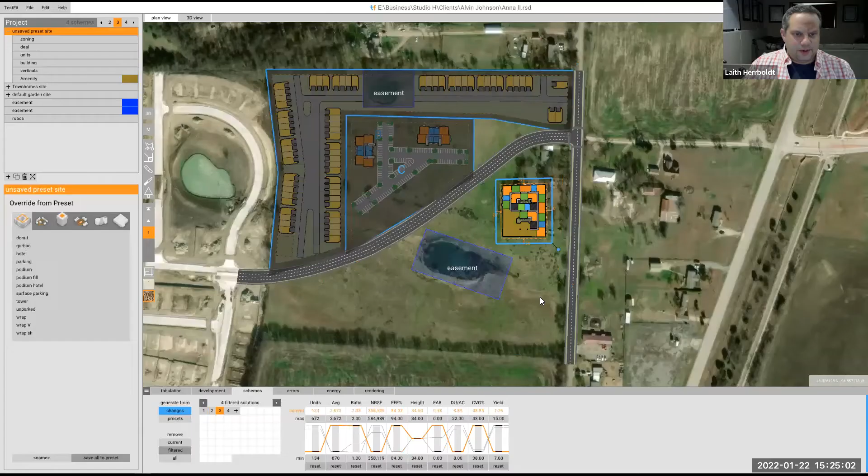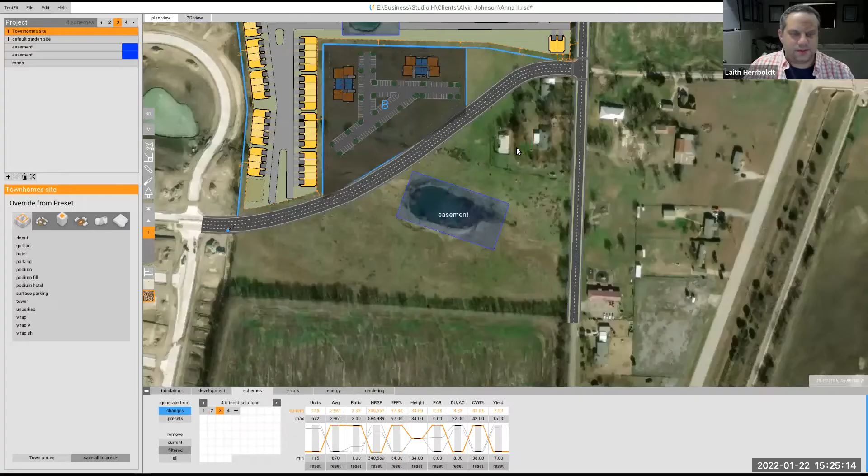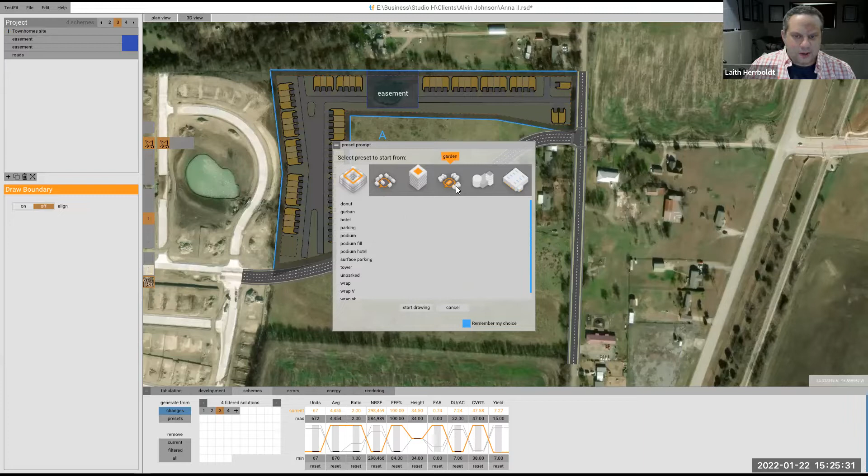So for instance, when we're looking at something like this parcel here, we can take this and in real time, I'll just delete this one and show you how it works in real time. So we can start a new site, tell it what we would like to put on there: garden, garban, podium, a tower, a parking lot, unparked. Do a podium. Okay, so we can just take that.

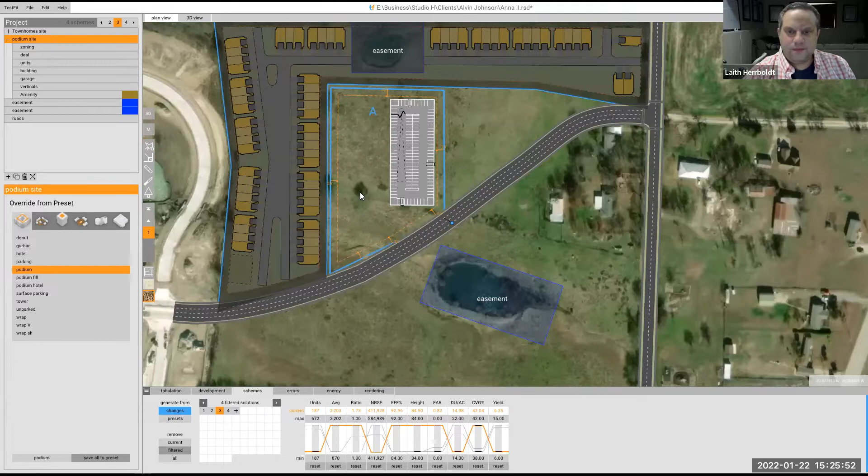And we can start drawing a site here on that 30 acres. And then we immediately have a building, a 2-story parking with 5 stories of apartments over the top of it, with amenity space here. And we can change that, that's set to be 10,000 square feet right now. We can go through the different levels.

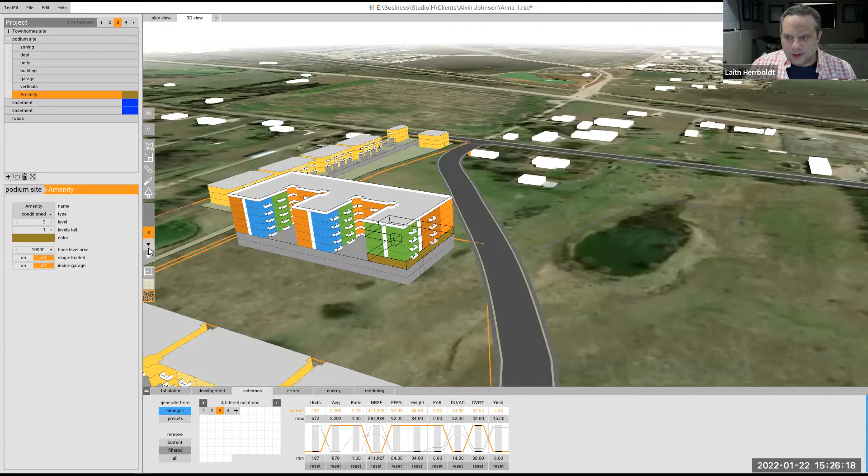I know there's a way to actually push one level of parking down, so we could have a layer of underground parking. But when we go back into plan view and then go up, we can start to see the different levels of the building.

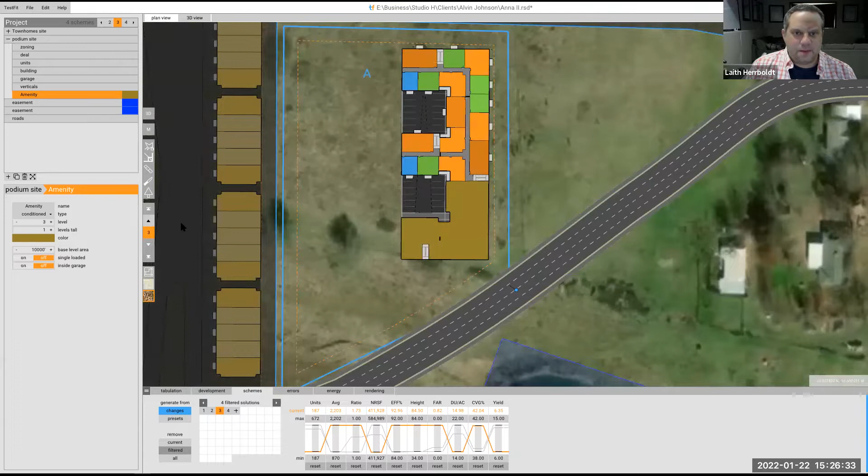So here's our amenity space. We can instantly take this and say, instead of 10,000 square feet, let's put that down to 5,000 square feet. We can single load it and have it just be on one side of the corridor, or we can have it be at the end here. We can say it's okay to put it in the garage. We can tell it what level we want it to be on, so we can move it up if we'd like.

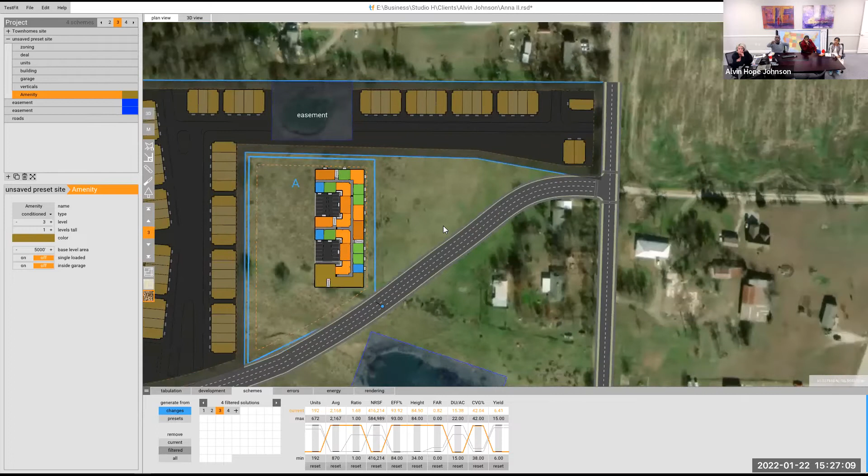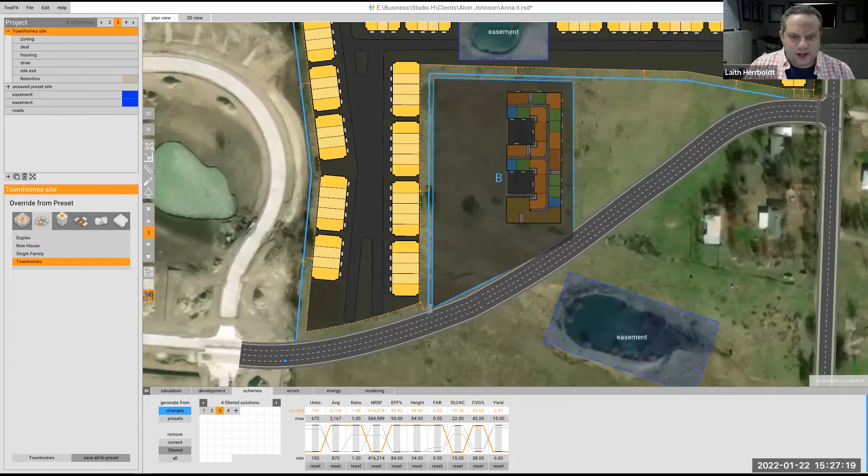Can you also show on that larger tract, or even on that piece, how you can just move it around, even if it were garden style? So even if it's garden style like this, we can take a point, and as we move the property line, it's immediately changing all these townhomes here. You're not having to move the townhome because you move the property line and adjust everything.

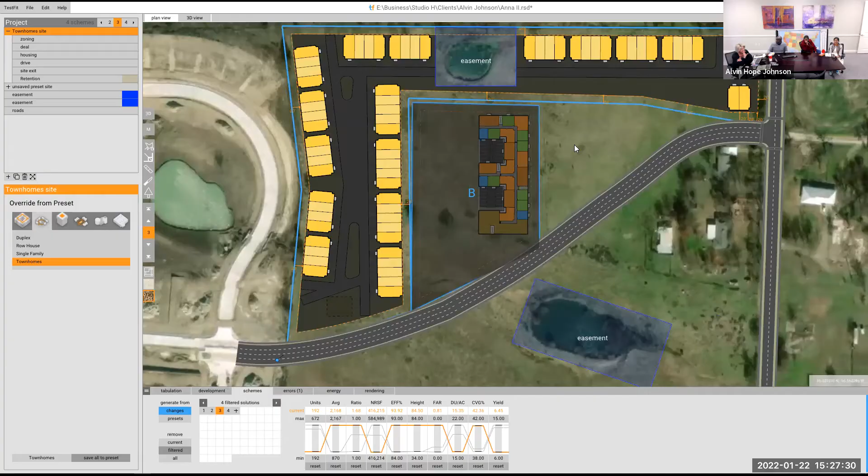That's really cool. You do it based on setbacks of the land, how it's zoned. So all those things can be factored in, the setbacks and everything, and then it just figures out a layout.

He did yours yesterday, the guy, Jack, that is with the company. Have you shown her the software yet? No, that's what Laith said. He's gonna get him that file and be able to show it.

Yeah, it looks really good. So factor all those things in based on the city's requirement, just plug them in, and then it just works.

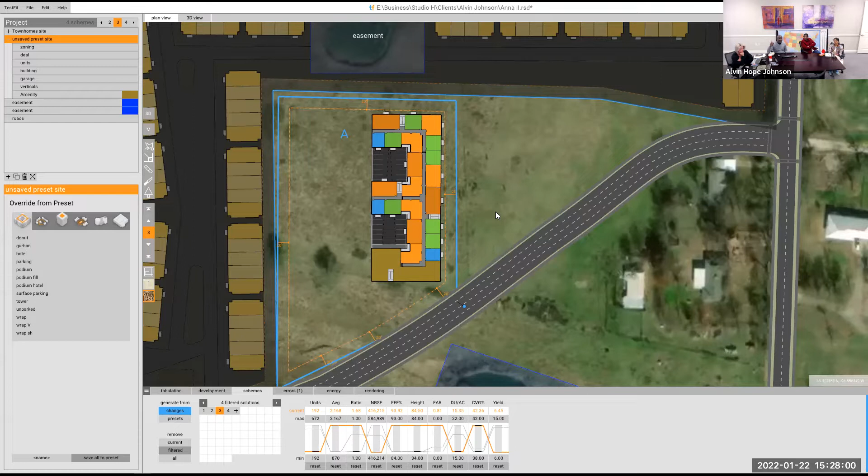If we had this, I don't know that the city would accept this in a zoning meeting, but I think that, and Don help me if I'm wrong, the way Jack played with this the other day, if we sat in a zoning meeting and showed them, this is what the site could look like.

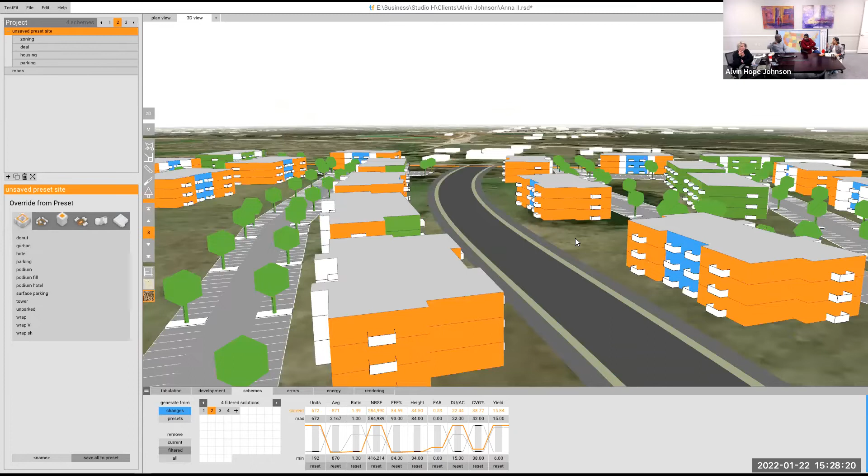Oh, you want the road here, oh you want the road there, and then you just add a sidewalk, tree, here. It also kind of makes it feel like, during the zoning meeting itself, we could progress things, because it's not like a lot of going back and forth, you can just demonstrate it right here on the Zoom, show how it works.

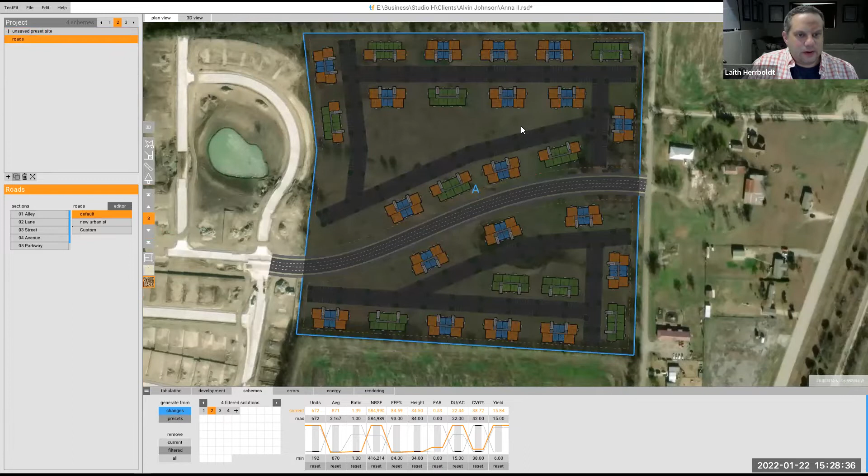For instance, we can just take this road and if we want to move it up, the city says they don't want the intersection here, we can move it up.

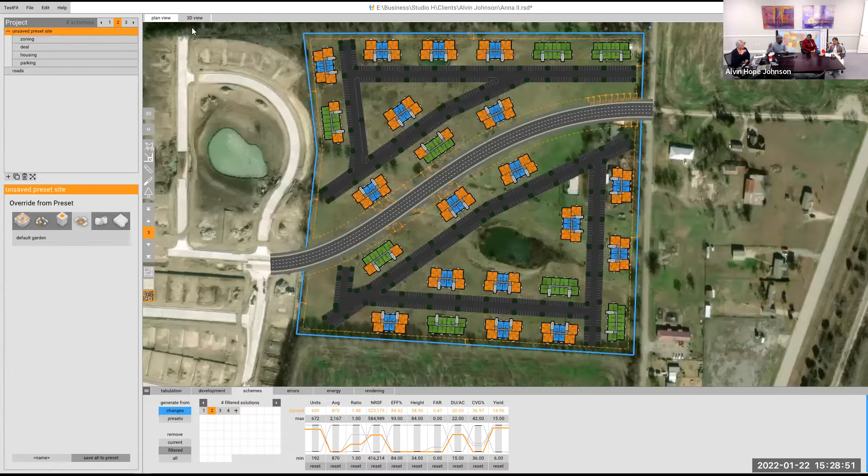We can change the angle of this, and now change what the angle is here. Yes, on any piece of land, isn't that cool? Whether we want 3-story garden apartments or we want something else, and there it is.

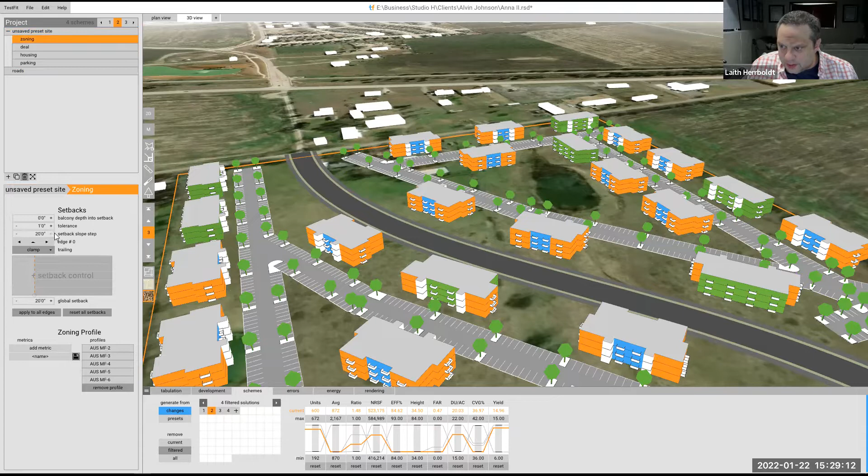Then we can come into the housing and change our floor-to-floor heights. Let's see, for zoning, we can change the number of stories. So we can change the number of stories on the fly.

And then in 3D view here, we can go over to render. This will kind of be colored as we take the color off of these units. Are you able to see that window? This rendered window over the top? No, okay, let me reshare that.

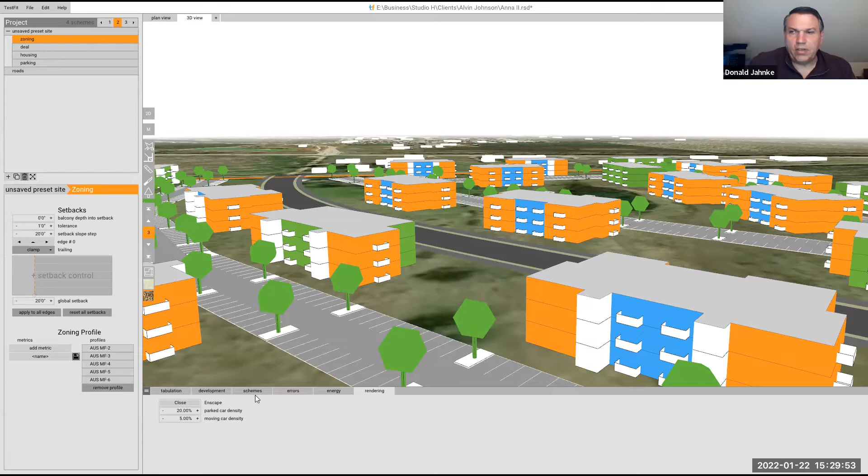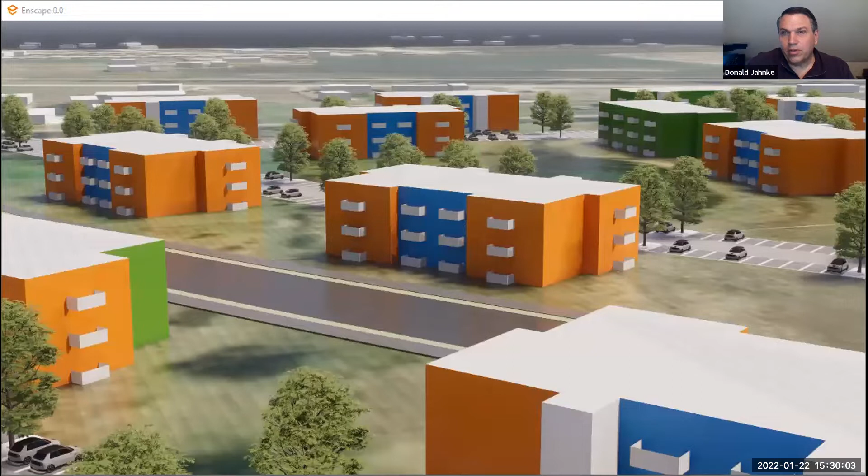What I'm thinking is, even if we designed it the way we think it'll work, if the civil guy thinks that works, if we had this program as a backup for the March 22 meeting, and if they say well, yeah, we would do that, but we need this or this, it could be adjusted to get their approval during the meeting. Exactly, it saves a lot of time.

And they get to see it visually, and we just make things happen on the fly, which Jack thinks isn't possible with traditional methods anywhere else. But then they have to agree to make the spontaneous decision there.

Well, those people will know, that is also true, because they are not the ones, I know that Anna's people are taking the help of Frisco city people. So they have to sit and explain to them, and they are the ones who are saying yes or no, okay.

But we could have it where they don't make a decision, save it, print it, we'll email it to you, and make a video while you're showing it.

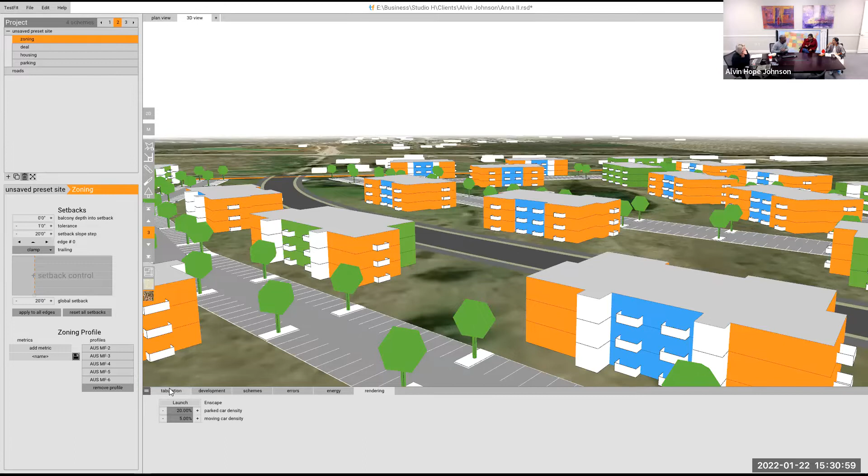It's easy for them to show, and then at least there will be less of the time involved.

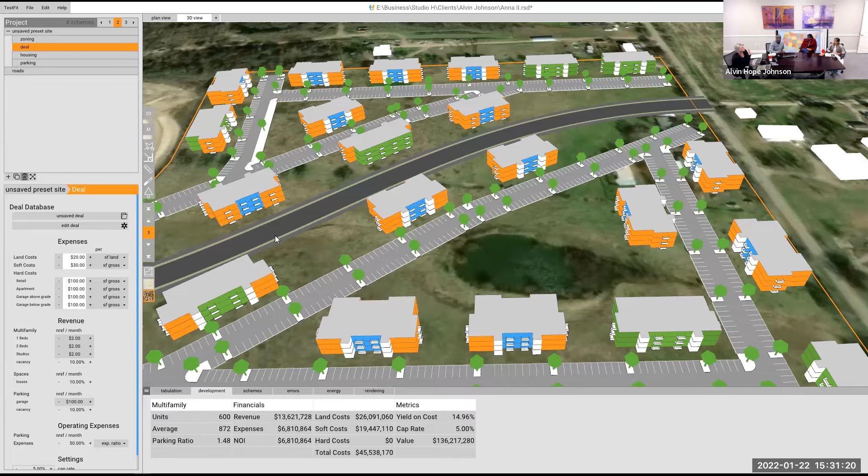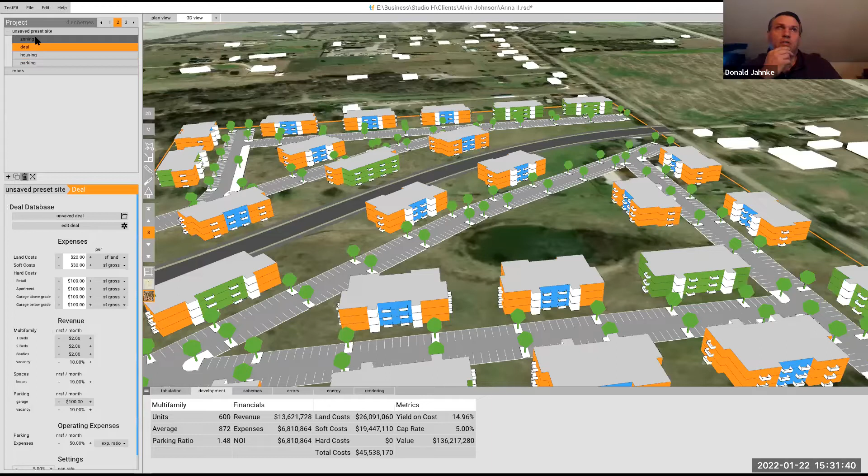Because doesn't this at the same time tabulate green space percentages and all of that somewhere? Yeah, you can actually.

Here you have your floor area ratio. So if a city says what your ratio has to be, floor area to green space, you can enter that information in, and it's instantly telling you on the fly, here we have 20 dwelling units per acre.

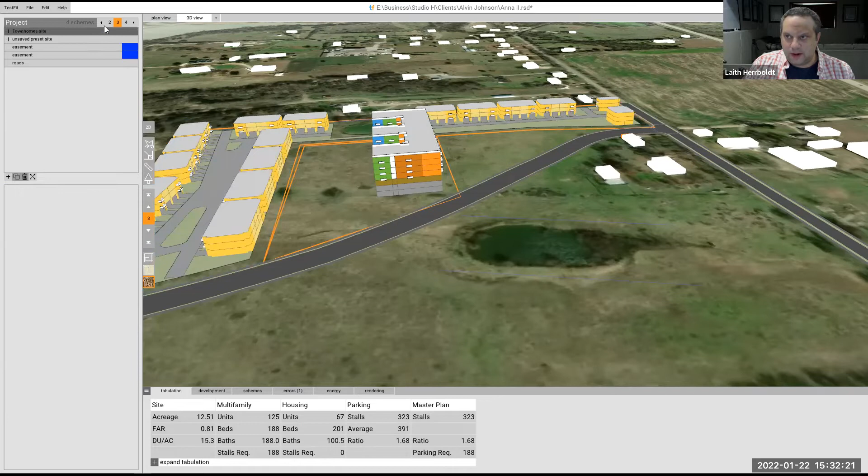If we go to a different scheme, I think they're all pretty similar at this point, but this one we're at 15.3, just because we have these townhomes and then this podium here. So you can do all these different options live and it'll tell you how many dwelling units per acre you have, then you can set up metrics to make sure you're not over height.

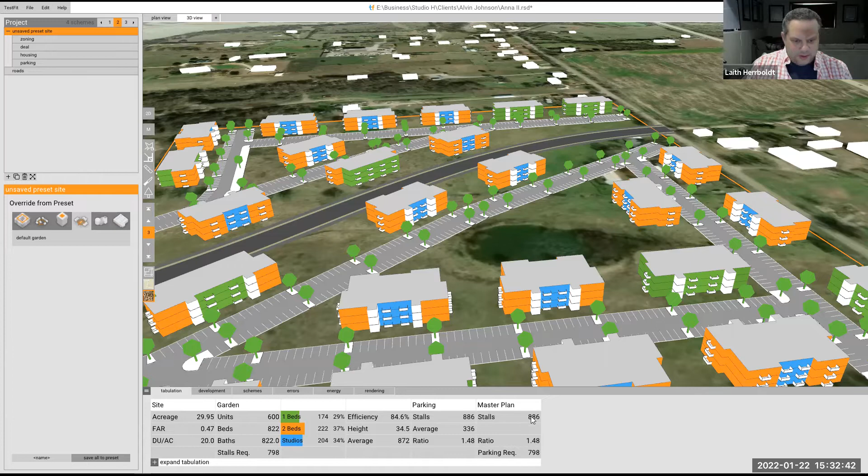You don't have too much developable floor area, not enough green space, so you can set it up per the city's requirements, parking stalls, all that stuff. It's keeping track of how many parking spaces and everything you have. Laith, will you hit that development button?

Land cost, we can plug in what the costs are, we can put in our cap rate, and if we get really specific about our units and our operating costs, it'll come out down here and tell us everything about it.

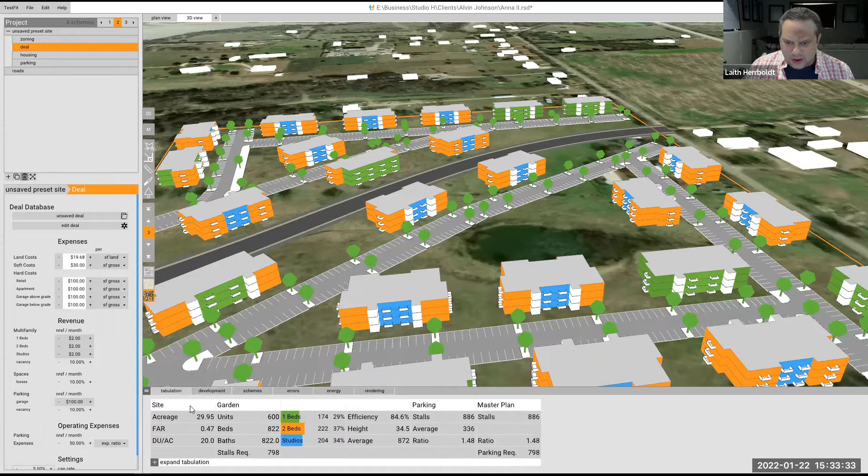So each option has a deal panel here, and as we adjust the land cost, it's adjusting the development, the pro forma on the fly. Soft costs, what your rentable square footage is, it's also keeping track of what your rentable and non-rentable square footage is, all those things. So you have a live pro forma.

Already plugged in. This is very exciting. Really cool, huh? Especially, I know for us it's like we only have one project, but for you guys, when you have all this stuff going on.

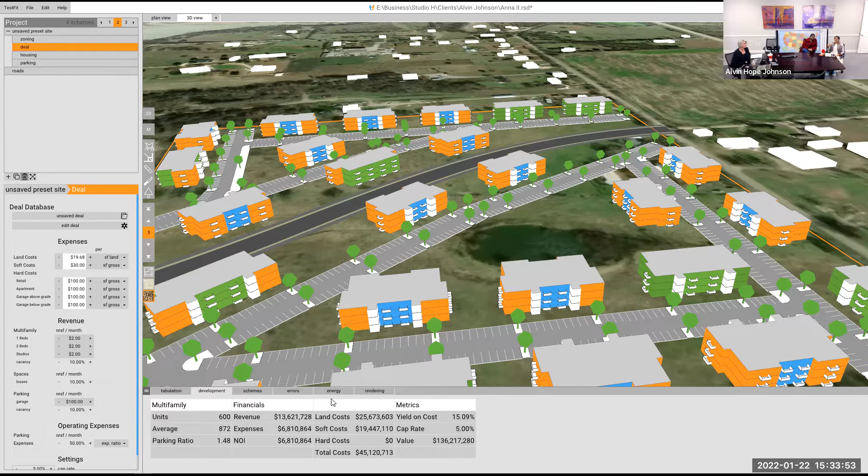It saves a lot of time, and look how impressive it is for Dr. Unger to come in and go, oh, that could be my piece of land, I can have that right now. And it doesn't have to be estimated costs once we just, they're giving us a 3-week trial because we're going to buy this program. I just got introduced to it with Laith and Don this past week, 2 days ago. And the timing just couldn't be more right, everything lining up. That's awesome.

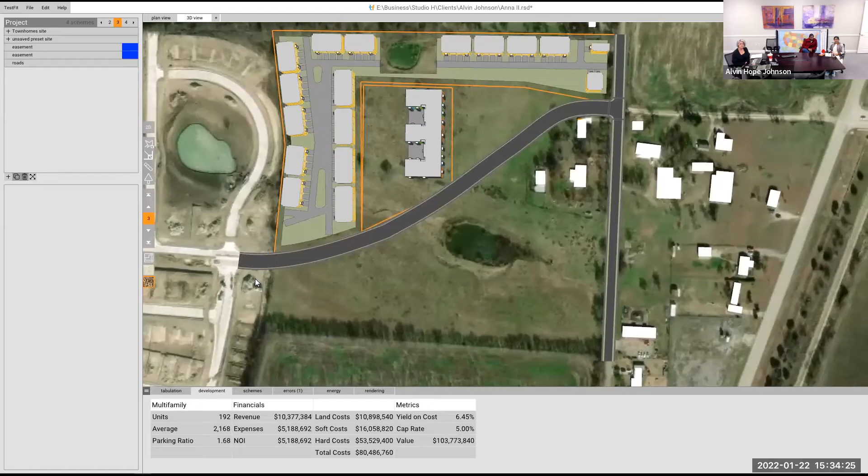Very exciting, very exciting, what technology can do. And when you see what it looks like, the way he did it the other day, it looks really cool. I got a sneak peek at it and I was just like, oh. You got that recording on your phone yet, don't you, Alvin? I do. That's what I was thinking, where's the one that I saw? Yes, I do.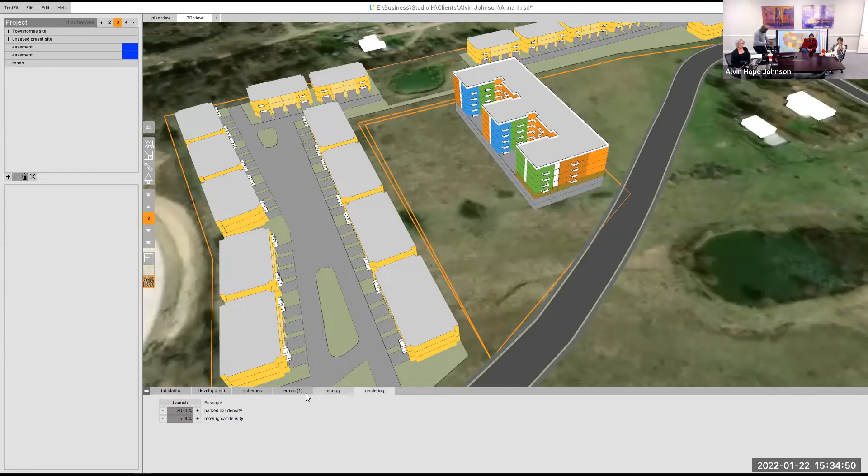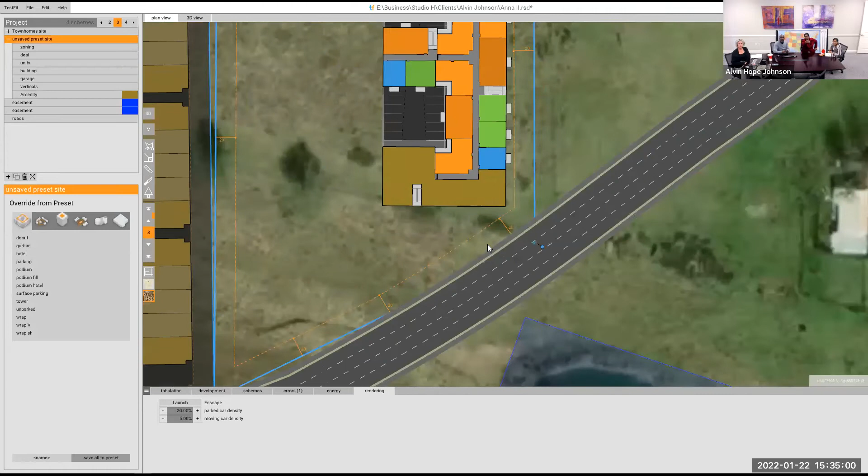So this is all parking, the yellow colored ones. Those are townhouses, I believe. Yeah, the yellow, because we're doing townhouses around the perimeter. Oh okay, at least got it. That way, because we have single family in this community, so we didn't want them to feel like we're just right in, looking over their backyards.

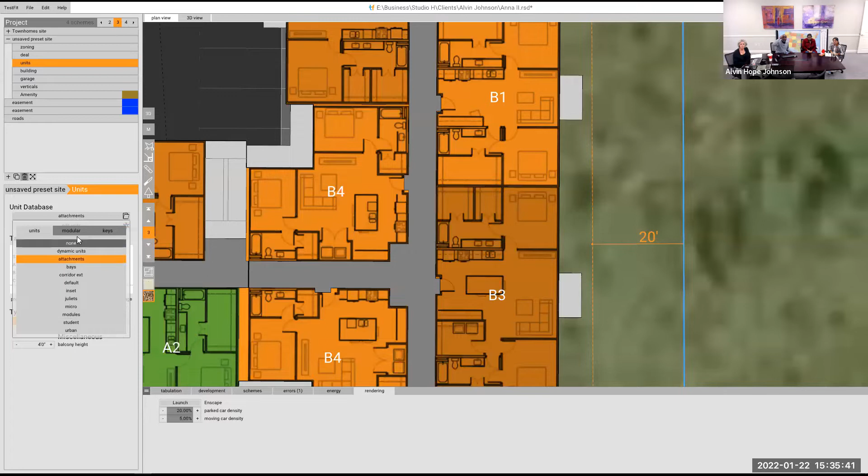The perimeter will be around the 3 bedrooms. What exactly is the Collin County outer loop, is it that road, which road is that in Anna? I think it is. That's Highway 5, and then 423 is right there. And that little road they want in there would connect the homes behind the land to be able to come out to Highway 5.

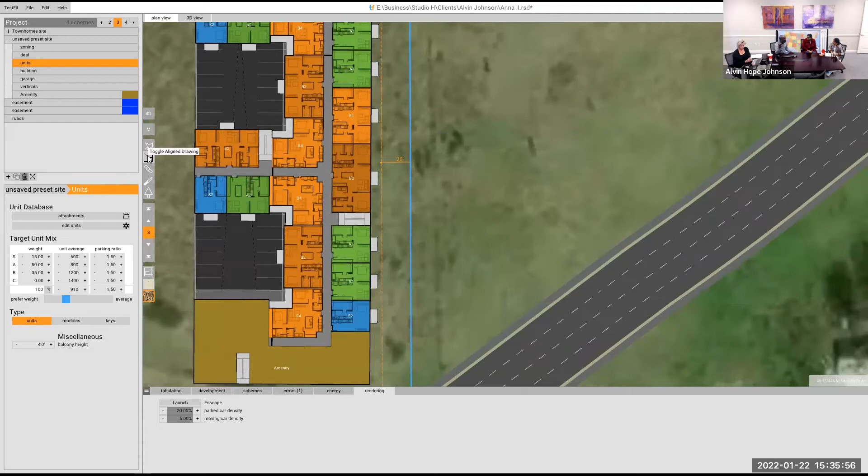And they said in the zoning notification we got that if we put it into spec, they'd reimburse us for the road. They would? Yeah, why didn't I read that in the email.

So by doing that you basically create access, and we're also looking at putting in some commercial space, a retail strip, so that also serves those folks coming in. But one of the things we were discussing is that it could make the area more busy because they're accessing through there.

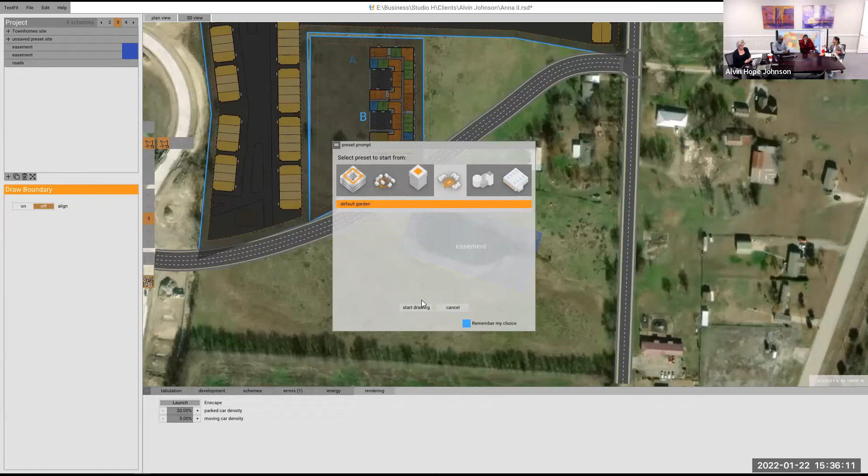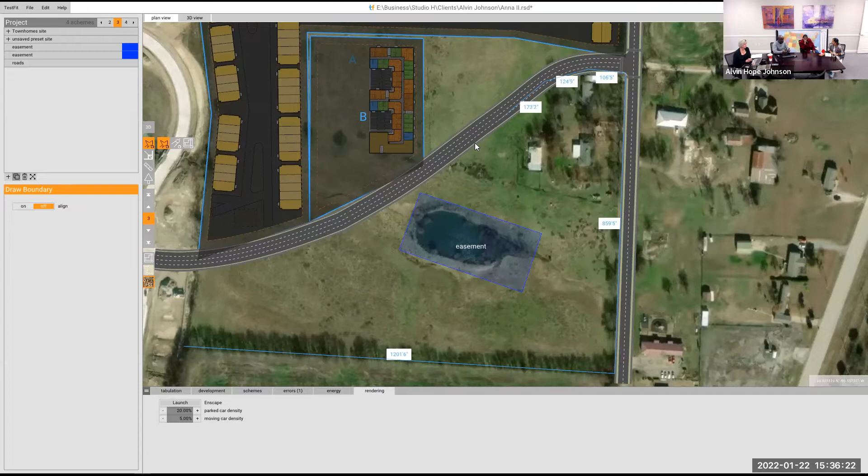If you put in really low speed limits, like 15 and 10, that might really discourage people from doing that. And if it takes longer, then people will be like, we're not used to it.

What is that easement, that little lake there? We have a pond. So that's a retention pond. Detention? Retention, for large flood zone, that's okay. We already have it on the property, so that also counts towards the green space requirements.

I am now saying these things. I was gonna say, oh well, since she's like... I just learned on the fly. I love it. But isn't it like the more you hear it, keep talking about it... it's exciting. But from the first time you get it, you're like, okay, I need to know how to talk about this, you're just spilling it out. Good job.

How can I fast forward this thing? Oh okay good, because I was going the wrong way. Yeah, just move that little pond bar thing, water in there, good.

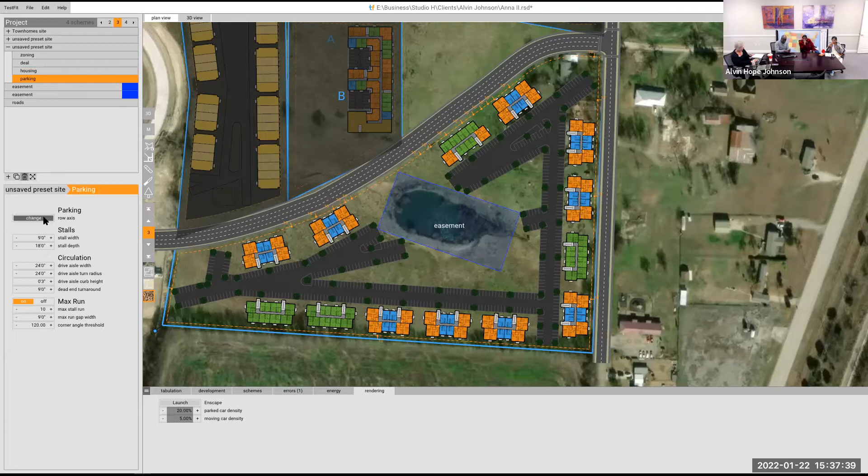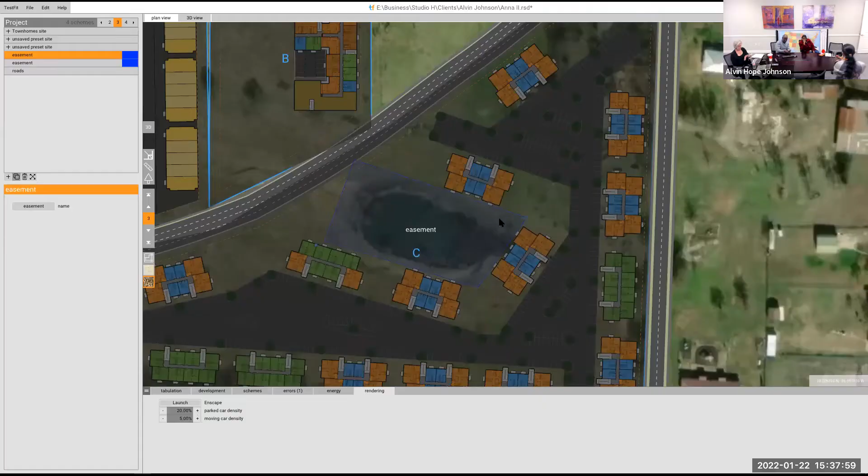I think you're asking about the location. So this is Texas 5. So we're not on Texas 5, we're right inside, just a small distance. It's just at the beginning of 423.

It doesn't look as impressive on my phone. Oh, but look, this is right. 'Cause that's Highway 5, so that's the one we're building, and yours is right off White.

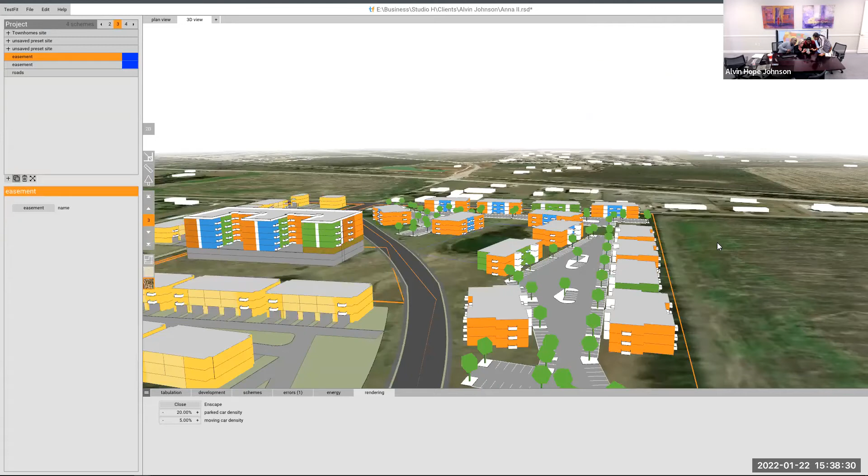No, ours is off the counter loop. Wait, go down a little bit more. I think it's here, right there, up here. So these are the Anna Town Square homes. There it is, right there. County Road, yeah, this is it. Right here, yeah, this is it, you can see the pond, that pond they were showing.

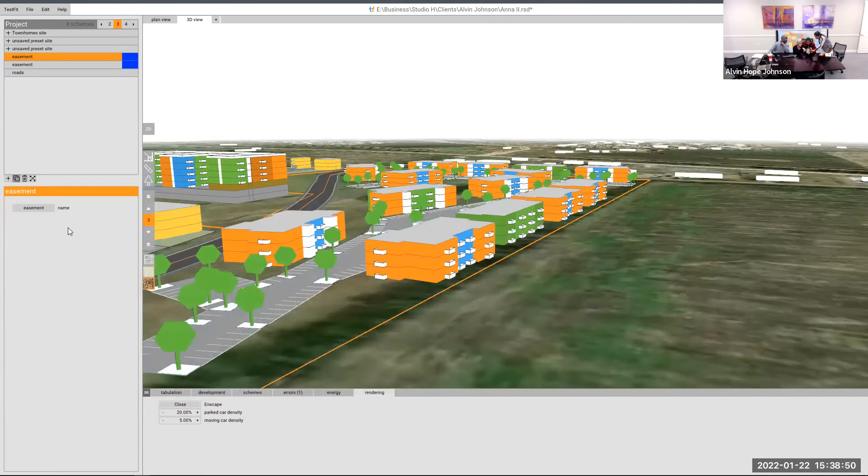This is showing the 50 acres that belongs to another guy, and this is ours, right here. We're not on Texas 5, but we're close. Yeah, right, boom, yes. But I don't want this to be on Texas 5. Right, and then that road they want to come through.

This is, is this the Anna Town Square? Anna Town Square, yeah, all the holdings on the right side is Anna Town Square. So it's more towards a little bit north, south of the Anna Town Square, right? This one? Yes, okay, got it.

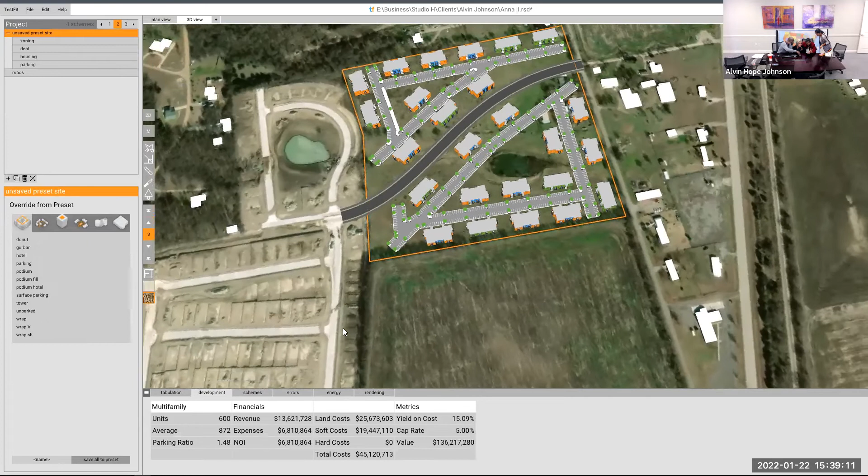And my land, I'll show you, you have to go on 5 a little forward, close to the downtown. Yes, it's on Powell, Texas 5 Parkway. Right now I'm trying to see, did we cross White Street? I think we already crossed. Yeah, I saw White Street.

That is White Street. Oh yeah, I saw it, because there's a railroad track over here or something, right? So this is Highway 5, right? Yeah, that's it, we are still on Highway 5.

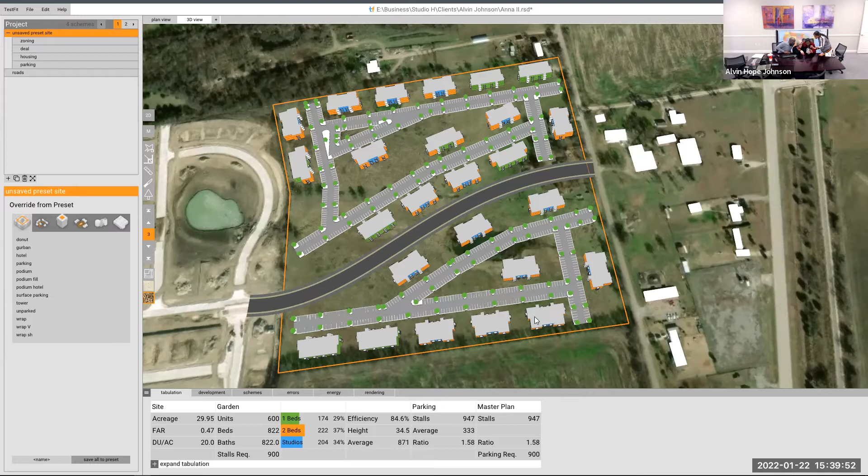So there's a small lake actually here. Where's the downtown? This is the White Street downtown area, right? No, this is White Street. I think yours is... we should have Sonic and post office and all that. Why isn't it showing? Oh, maybe it's an old Google map, well I just pulled it up on our phone.

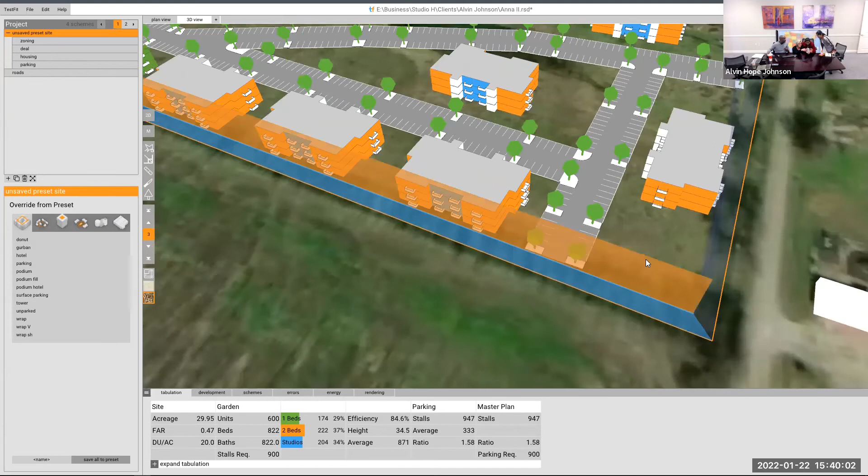So you're right here in the corner of White Street and 5. Not too much corner, because in the corner you have Sonic and then you have the post office, that's right.

Before we purchased ours, we were thinking ours was off White Street. So you're close to her, doing apartment complexes on the other side of Highway 5? Yes ma'am. You know where the transmission shop is? This is where ours is, right there. 1200 Powell Parkway, that's yours?

There's a transmission shop on the corner, and the land right behind it, the 12 acres right behind that transmission shop, has a mobile home on it right now. That's the transmission shop, and that's the home. I got a letter from the city that there are plans to build an apartment complex.

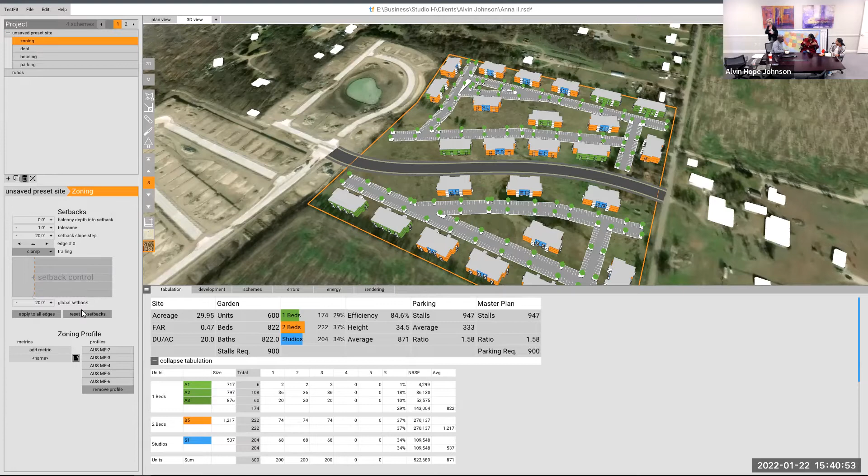I think when you applied for zoning, usually they send letters to all other owners who applied for zoning for another one. So then you are different. Theirs was rezoned out in 2015. Okay, so this was about one year back, during COVID, somebody tried to do the zoning for multi apartment complexes in that area, which was on the other side, the same side where your land is.

So there's gonna be a lot popping up in there. I mean, I think the need is like 5,000 units, but I don't know why nothing is happening right now. For some reason it's kind of slow. I think everybody's doing what we're doing right now, planning and preparing.

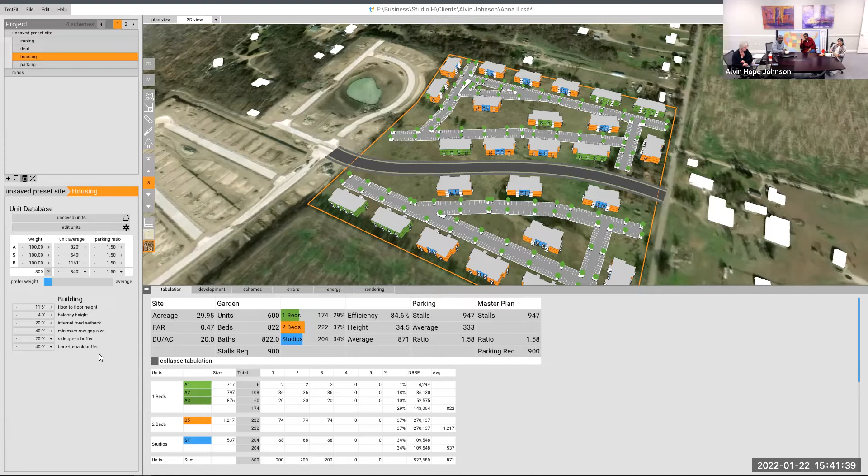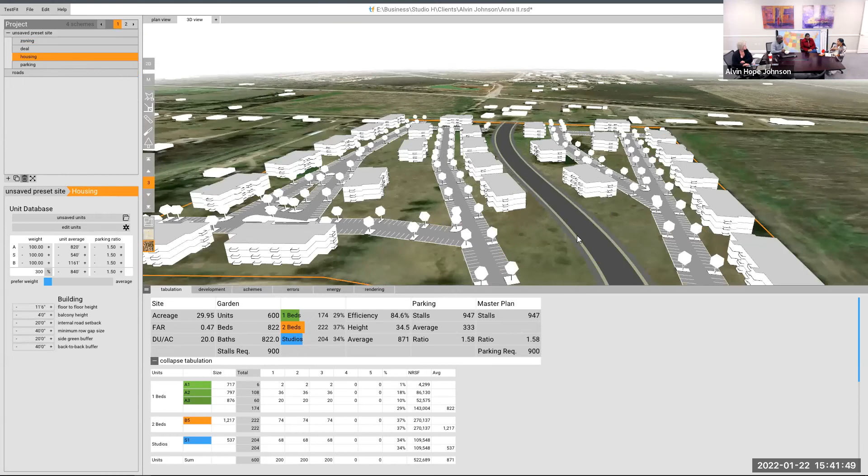For example, I think the groundwork takes the longest. And then you'll look up by Christmas and be like, man, where did all these apartments come from? Yeah, like in Lake Ranch, now the whole thing is this mixed type of concept. Someone built 400 plus apartments, it just happened in less than 7 months. Everything's ready, they're leasing. The groundwork is just what takes time. I know, this is what's taking time.

So who wants to fill Texas with snow again? I know, looks like snow. You never know, with global warming maybe we'll get snow. And New York will become like Texas. I was wondering about that, Alvin.

So what happened to us, the freeze, which is believed to happen every 10 to 15 years, could be happening again in the future. So in the way we are constructing now, we have the power to keep these things in mind, which are very weird things, so we won't break a pipe from freezing.

Two reasons. Here in Texas, most of the water is on the outside walls. We look out the kitchen window and run the sink and that pipe is right there, so it freezes. All of the water in these units is in interior walls, nothing on the perimeter. That's how they build up in Minnesota.

Right, because those guys have to deal with the cold. That's one of the reasons, and then of course their frost line is 4 feet deep, so they have to have basements, and that's why they insulate the foundations and all kinds of things. And when you can learn how to keep it warm, surely it should stay cool pretty easy, right?

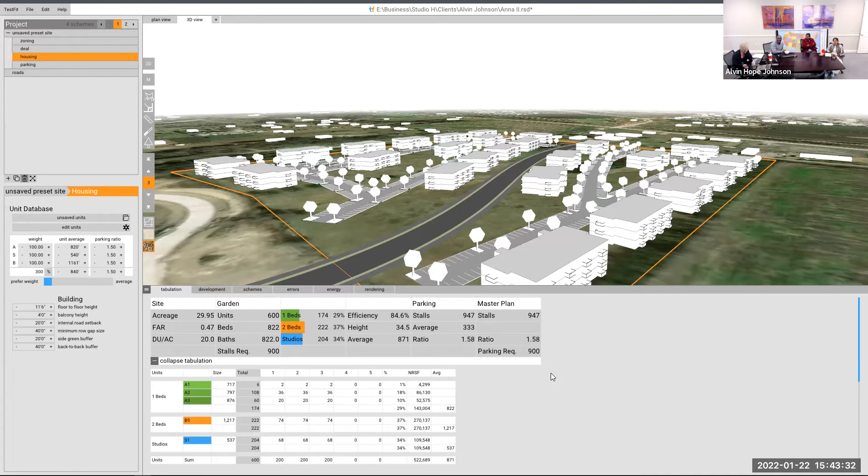The principle of how a structural insulated panel is made is the same as a walk-in cooler. You can go into Sam's or Costco, you're in a building that's 70 degrees and the dairy part is just made out of structural insulated panels. You walk in there and it stays cool. They don't necessarily have it inside versus outside, and they don't care which way the temperature flops.

Makes sense. You make it sound so simple.

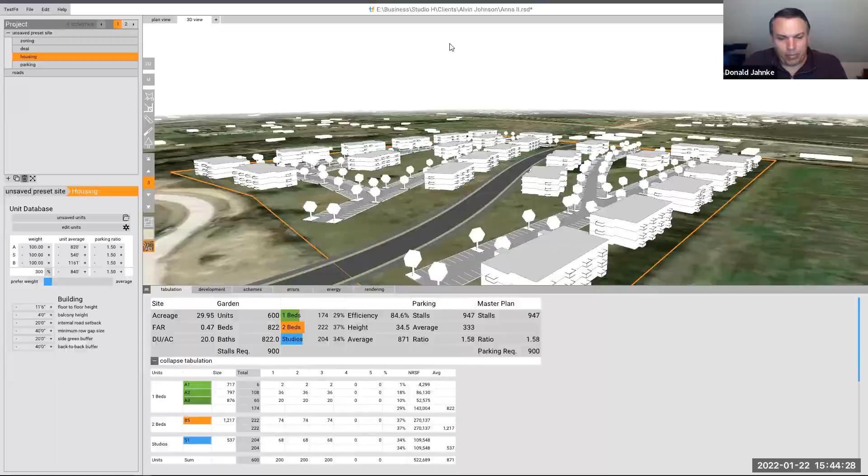It's the simplest thing building science wise, because a lot of people don't realize, like if you take your cold days, like we have our hot time in the summer, if you build a stick built wall and insulate the cavity, your vapor barrier should always be on the warm side of the wall. The tricky part for us is the warm side of the wall changes about 5 months out of the year.

Same thing with you guys - you'd build a house one way to make it work in summer. Technically in your cool time of year you should build the wall in reverse, because that's a one-sided wall. The unique thing with a structural insulated panel is, from a thermal standpoint, it doesn't have an inside or outside.